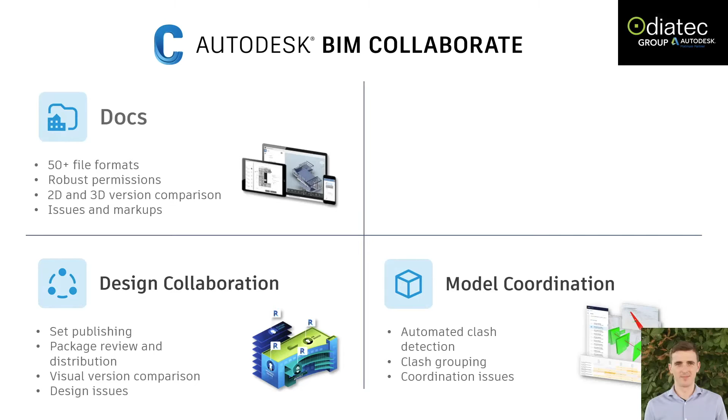And then as part of the Pro package, what you actually get is the Revit Cloud work sharing add-on for that as well. So what the Pro version gives you is that view of your complete project. So it's a timeline view of when models were shared, for example, and this is all accessible in your web browser. And this is as part of that BIM Collaborate Pro package.

This is accessible in your web browser through your Autodesk Construction Cloud, and it basically gives you what's called the swim lane view. So that will tell you when each team or team member shared a model. So for example, that could be the interior design team. You can see the date and time that they last shared a model or a package.

So a package can actually contain a model, CAD files, specification sheets, room data sheets, Excel files, Word files. All of that can be part of a package, and that also appears in your timeline. It's not just for drawing or model information or 3D models. It's a lot more than that as well.

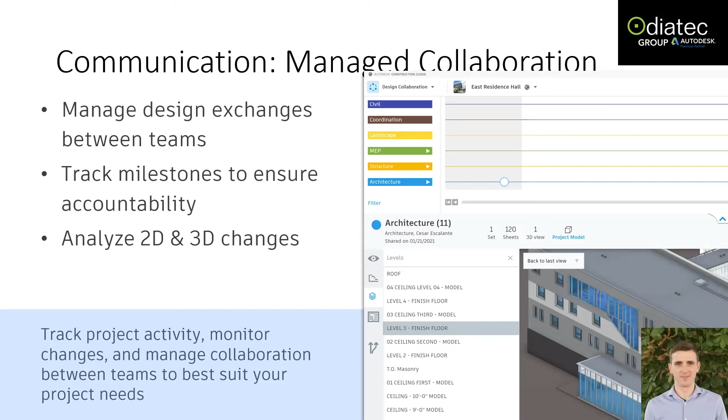It also integrates with Microsoft Office. There's a 365 integration as well. You can actually edit documents within the web browser from inside your Autodesk Construction Cloud. You can create things like markups and add comments if you want. And the reason I say if you want, you can just use design collaboration just to share models and to create that Revit connection if you want.

But you can do a lot more with it by creating things like issues, and that'll be what I'll touch on today once I jump into the demonstration itself. You can track issues through the cloud, basically. Two of you working in separate locations, perhaps, one in Dublin, one in Cork or London, or across the globe.

Someone can drop a pin on a model essentially, and somebody can pull that push pin into Navisworks and into Revit as well, using those issues plugins that I mentioned, and I'll show you where to find those.

The coordination side of it: I mentioned BIM Collaborate Pro and BIM Collaborate include a module called Model Coordination. Essentially what that is, it's Navisworks in the cloud. It's just a lighter version of it, if you think of it that way. Its prime function is to perform clash detection. But the great thing about it is that the clash detection is actually automatic. You don't need to run a Clash Detective.

And this would be used alongside Navisworks in industry, and that's what a lot of our customers are using at the moment. They'll still use Navisworks for the heavy lifting, clash detection, quantification, and that type of task. But they'll use model coordination as part of their BIM Collaborate Pro just to capture clash detection, maybe to do an internal check of their own model, perhaps before they publish it to the rest of the design team, for example.

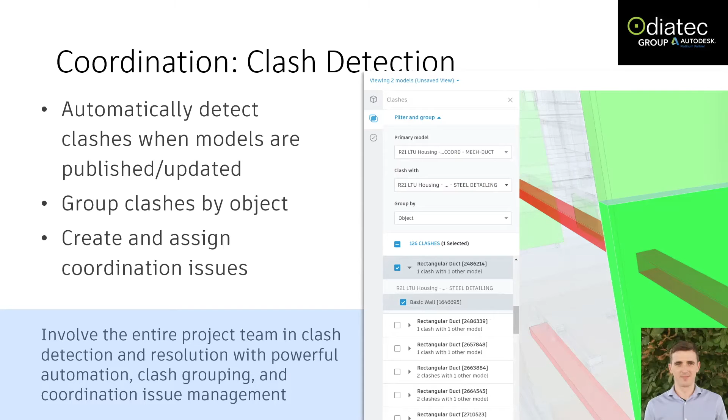And that gives you a visual graphic of, okay, as we can see here on the right, we've got a duct running through a wall, and the items highlight in a different color. So it's telling you this is going to clash, i.e. this means it's not going to happen on site. And that's the biggest thing that we're doing here. We're avoiding physical clashes that occur on site by performing something like this. And I'll show you some of those workflows as well.

I suppose some other features of Autodesk Docs, just at a basic level, is the versioning. If you upload a new file, it automatically gives it a new version. And the benefit of that is that you can actually compare version 5 to version 10 and so on and so forth. So you can overlay a PDF file and it will highlight in a different color. You can overlay a CAD file, DWG, and a Revit file as well, and lots of other types of file formats. You can overlay them and the change will appear in a different color.

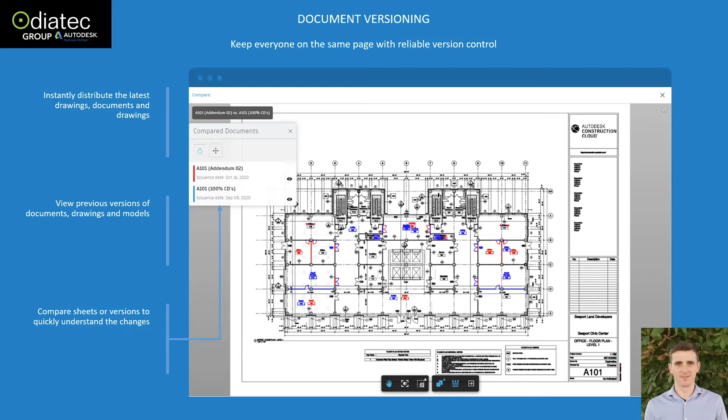And to me, from a practical standpoint, you're not looking for changes in the model. The changes are appearing for you. You're not seeing, okay, has this door actually moved, and referring back to previous drawings that were emailed or saved on a server. The comparison tool is extremely powerful in my opinion, and it's very widely used, I have to say, by a lot of our customers and Autodesk customers as well.

The issue management is quite a key thing across Autodesk Construction Cloud. The reason for that is because when you create something called an issue, an issue can be considered as a type of markup. When you drop a pin onto a drawing, you can assign that to an individual. That individual will then get a notification, and you can manage the status of that issue. So is it still open? Has it been closed? Is there a deadline on it? Has it gone past that deadline for it to be addressed?

And that can be a design issue. It can be on-site issues as well, clashes on site perhaps, compliance issues, BCAR issues, for example. And you can do more with those on site using the Build module. We won't cover that today, but the clearest thing I should say is that issues sit across the entire platform. So if you create an issue at design stage in an architect's office or an engineering office, that issue could potentially be viewed on site as well to see if it was actually addressed, if an error made it to site, for example.

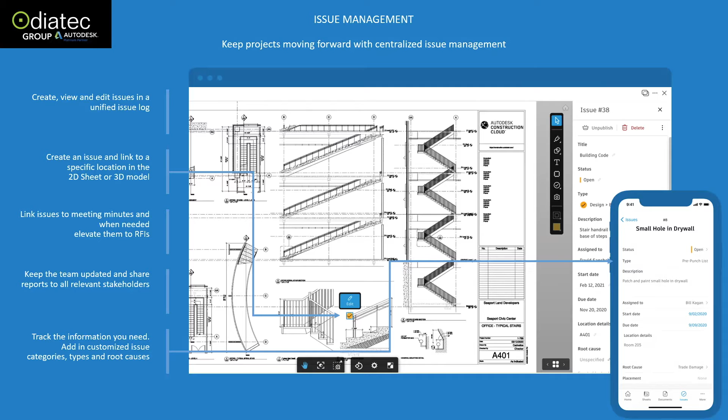So that complete audit trail is there from the design stage right up to the construction stage, and then even to the handover stage as well. You can hand over all those closed off issues and see what issues made it to site, for example. So you can control documents, complete folder permissions. I won't go too deep into that, but you can do that.

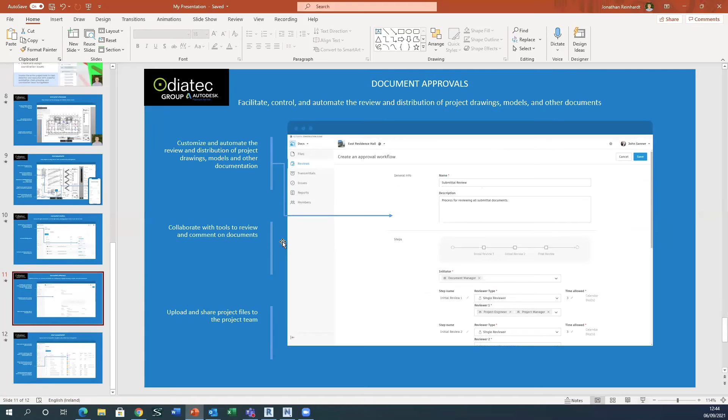And you can also perform something called document approvals. So this is essentially moving a file or a drawing or a model or a specification document through the platform of Autodesk Construction Cloud from Autodesk Docs, and just having it approved by an individual. Once it gets approved by that particular person or multiple people within the company, the file actually gets copied into another folder. So how I like to show that this works is by moving something from your work in progress area into your shared area. And all that basic functionality is available just in Docs. And you can also perform issue management on that type of approval workflow as well.

So that's just some of the high-level stuff that I wanted to show to you today, what Autodesk Docs essentially does. And I appreciate there's probably some people on the call that are experienced in Docs and experienced using BIM Collaborate Pro, but hopefully I can address both parties today. So just to make you aware, if you have an AEC collection, so that's if you have Revit and AutoCAD and Navisworks in that collection, in your Autodesk manage panel, you may not have access to this, but your contract manager or your BIM manager should.

A lot of people don't realize that as of recently, the AEC collection actually includes Autodesk Docs. And Autodesk Docs is, I suppose, the baseline of Autodesk Construction Cloud. The way you're going to find out if you have it, and I recommend people do this afternoon if you're not using it already, go into your AEC collection or get your contract manager to do it, and you'll see that it has Docs for AEC collection available under there.

You basically just access that now from inside that panel, and then that's going to bring you into Autodesk Docs. So that was added by Autodesk this year into the AEC collection. It was a pretty big move forward, because it means you can work on files and you can save them directly into Autodesk Docs. So Autodesk Docs is accessible inside your web browser. You'll see the address to access it is acc.autodesk.com.

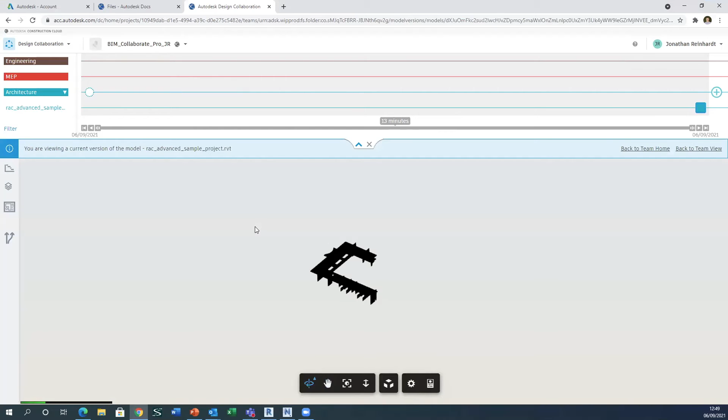So that information is then retrievable inside of BIM Collaborate Pro. So essentially what you do is you create something called packages. So here we have the architecture model was shared. So initially the architecture model was shared and we can see when it was shared. You can also find out who it was shared by as well.

So that's showing me that the architecture team have actually shared two models. They shared one here on the 6th earlier today, and then they also shared a model again on the 6th as well. So this complete timeline, as you can imagine, across a project can get quite busy. So what it's doing is allowing you to manage all of that model syncing from Revit and from the other people on the project.

Now, this can also be used internally. For example, we've lots of architectural firms that are using this just to collaborate between their various different staff as well. You may not have engineering and MEP team. You may have team 1, team 2, team 3, or you may even have individuals as well. So that's very customizable in terms of the teams. You can name them accordingly, however you want.

Now, all of these models that you see are actually stored in Autodesk Docs. So this model is actually being pulled in from Autodesk Docs, and it was originally pushed in from Revit as well. So just think of Docs as where all of your files reside. So that's just looking briefly at what design collaboration does.

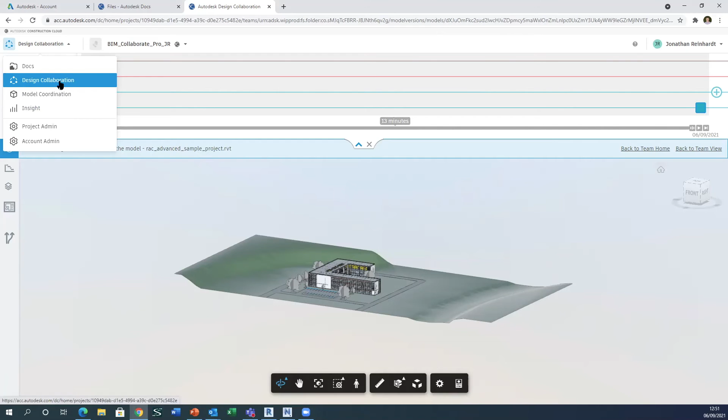Then with model coordination, I can actually pull in any models that reside in my Docs platform. It will give me a list of them here. I can then perform clash detection in the cloud. All I have to do is select any models from inside my project, and all of them will appear here. You can create them in separate spaces. I won't get into that, but if you've lots of models, you can segregate them by discipline or by user also.

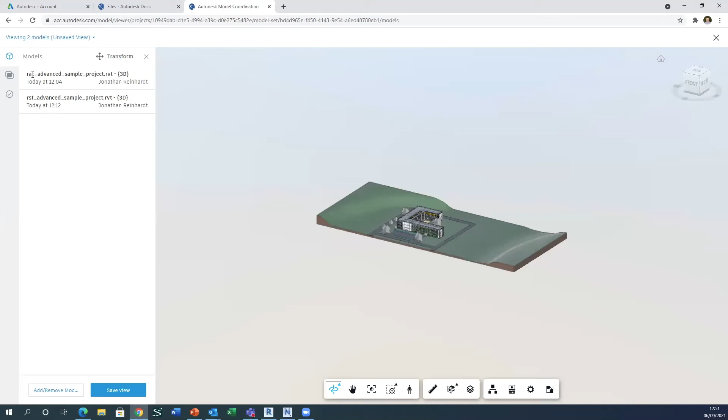So I can just select these two models that were synchronized from Revit. I can then look at the clash detection in that, and this is automatically clashing these for me. I don't need to choose clash detection or anything. It's loading them together. So here we have a structural model and an architectural model. I can just go into the clashes here, and it's automatically going to clash everything in that model for me.

So it's clashing floors. We've got an architectural and a structural floor, so obviously we know there's going to be an issue there. Somebody has to replace or move their floor, either the structural engineer or the architect. But let's just click on one of these clashes. It automatically zooms you into the clash.

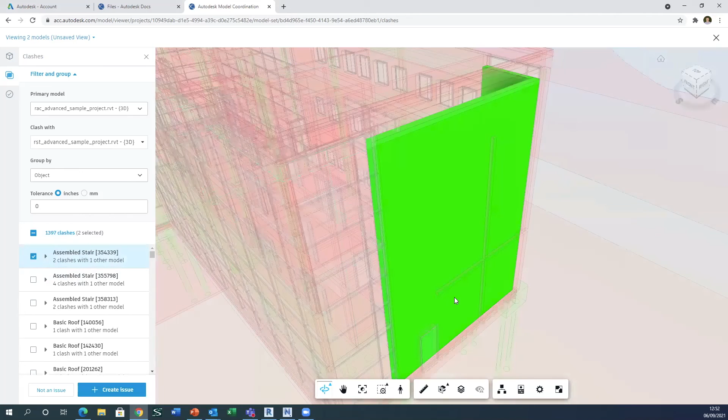What I can now do is create something called an issue. So I can place an issue on this. That's just going to load up that issue in the cloud for a moment. I can actually pull this issue into Revit, but I can also pull it into Navisworks if I want, using that issues plugin that I mentioned.

If I want, I can assign this to an individual. I could assign it to myself. I'm the only person in the project, but I could assign it to the construction manager or BIM manager, for example. And I can add a comment and say, please edit wall. So that's a clash we've detected. I'm just going to hit submit on that. So it's added a comment in there.

I can go into the activity log and see what's happened. I can see the comment was added and who it was assigned to. So maybe this is me as a BIM coordinator, or maybe another designer performing this role. What I can do now, just briefly, let me see what model I'm in here. So I'm going to go into Revit and check that this will load for me. So I've just generated that issue in Autodesk Construction Cloud.

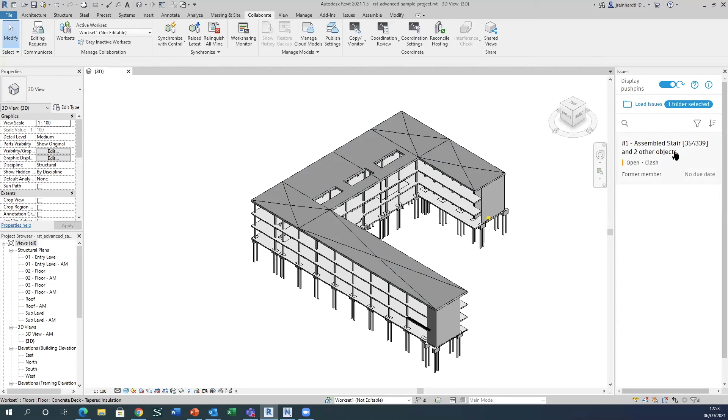It's just loaded in that issue. So what I can actually see now, I can click on this issue and it's going to bring me to that issue immediately in Revit. So that was just created in the cloud, by somebody working remotely perhaps, and pulled back down into Revit. So that's using that issues plugin.

And then the Revit user can then go and address that issue that they need to. They can view the comment and see who it's assigned to. And it even gives them a screenshot automatically of the clash that occurred. So that's the Revit issues plugin, pulling that in from Autodesk Construction Cloud.

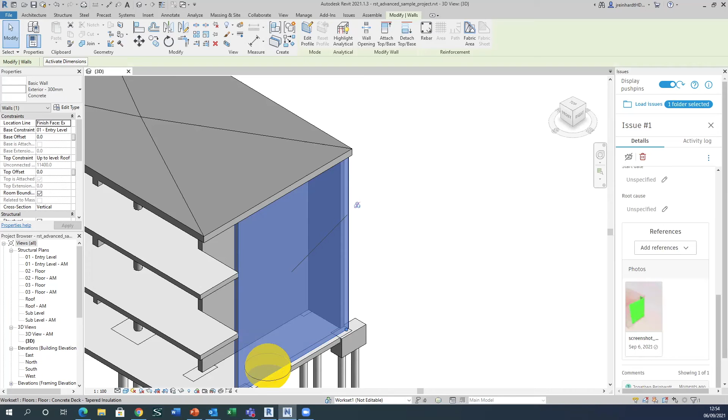What I could also do as a Navisworks user, so perhaps I'm a different user, I can also then go into Navisworks and open up those same models. So let's just see what I can open up here. So I can go into that particular project. So this is pulling again in those models. And I know it's these two models. I can open that.

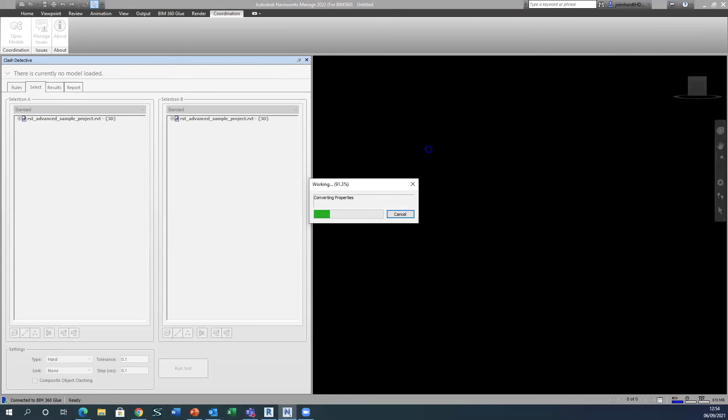So that's just going to load up those models that sit in my Autodesk Docs. It's not replacing them or anything like that. It's actually opening them from inside your Docs folder within your Autodesk Construction Cloud.

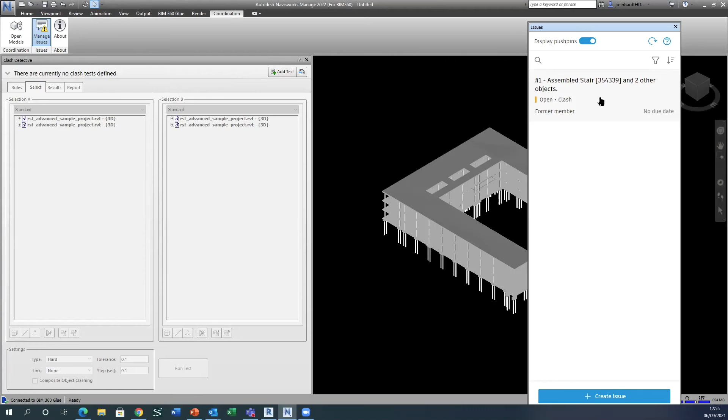Now, what I can go in here is actually manage issues, similar to Revit. So it's just loading up a panel on the right hand side here. And again, it's showing me that same issue in Navisworks as well. So that's kind of a round trip workflow, maybe going from architect to engineer and back again through Revit, through Autodesk Construction Cloud, using BIM Collaborate Pro, and then pulling it back down into Navisworks, perhaps as the model coordinator as well. And you're able to track those same issues.

So the BIM coordinator could potentially come in here as well, and they could add comments in here if they need to. But also they can assign this to a different person, or they can even change the category of that particular type of clash. Maybe it's a compliance issue. And the reason you categorize it differently is purely from an analytical point of view. You can pull all of that information down into your analytical information as well.

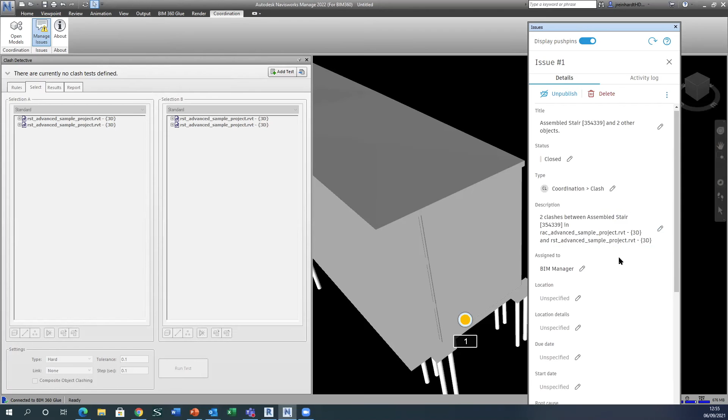So maybe they want to close this issue. So the BIM manager is going to close this issue. And what this is going to do is push back up that status as closed. That's been addressed. And then when I refresh this, it's going to show me any of those clashes. So I can just go back into my home screen within Autodesk Construction Cloud. And all I'm going to do is just view that clash that was created in the Construction Cloud, and then I made a change in Navisworks to the status of that.

So let me see, oh, none of my issues are there. Two seconds. Oh, Docs. So I can go into my architecture. Oh, there we go. Sorry, they moved it from BIM 360. It's now on the left rather than on the right. And there we go. We have that issue appear in there. The status has been changed from inside Navisworks.

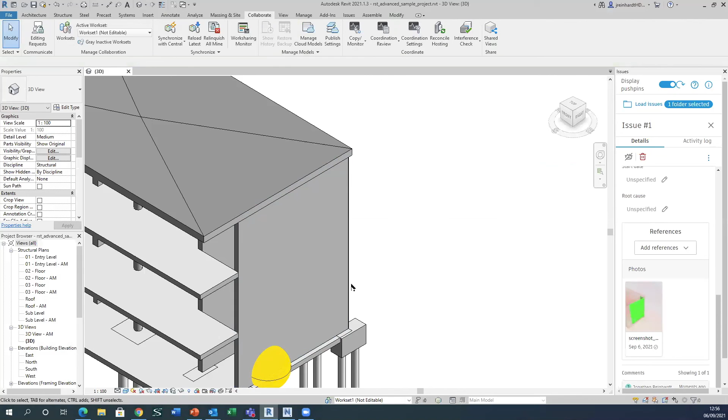The Revit user has potentially made this change to the wall, pushed it back up using BIM Collaborate Pro, and then the issue has been managed by the BIM coordinator. They've closed out that issue, and the issue no longer exists on the project.

So that's essentially it for today. I appreciate that was a whistle-stop tour. I got through as much as I could in the couple of minutes. Now happy to take any questions. Thanks, Alan.

Thank you, just one question I have for you there. I made reference to returning to site and returning to offices and so on, but to what extent have cloud-based design tools like this become more common now in the workplace, in design houses? I'm assuming there's been a step change in its use. Massively, Alan. You've definitely hit the nail on the head there.

Unfortunate what's happened in the last 18 months, but as a result, people are using more cloud tools, whether it's Autodesk Construction Cloud or something else. And these tools are being used extensively by the industry in Ireland. We see it every day. These types of processes and workflows are just helping people work that bit more efficiently.

But I don't think the goal is to necessarily work more efficiently. We're just trying to take the headaches out of what would have been previously more manual tasks of perhaps sharing models or sharing files or capturing errors before they reach the site. This just kind of streamlines it to make it a little easier on people actually working in the software and working on projects as well.